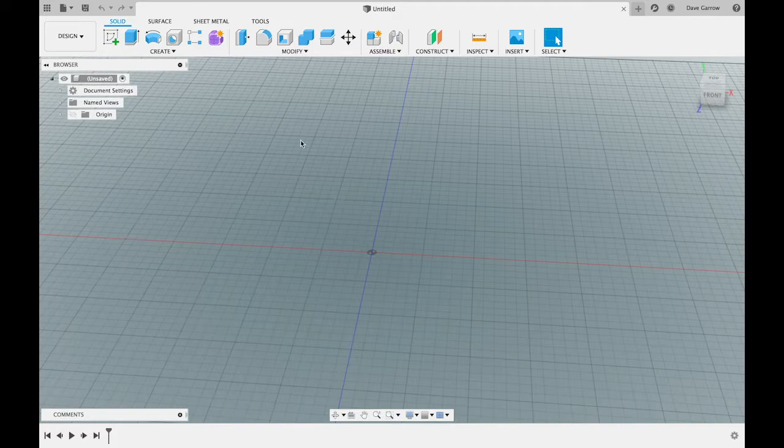Okay, so I'm just going to create a box with a lid and maybe a drawer or something, just so you can get an idea of the layout of the design section of Fusion, and the easiest way to do it, or the way that I do it anyway, is starting with a sketch on this plane, which will be the ground.

Create a 2-point rectangle up here, click finish the sketch, click extrude, and then you can pull it up or define the size. So I'll say 10 is fine, and then we want it to be a new body, so it's already there, that's fine.

And then if I want to change the dimensions of this, you just pull aside, extrude it, and let's say I want that to be another 50 that way. I want it to be 50. And then join, because it's going to be this part of this, like this. Extrude, another 50, join, okay.

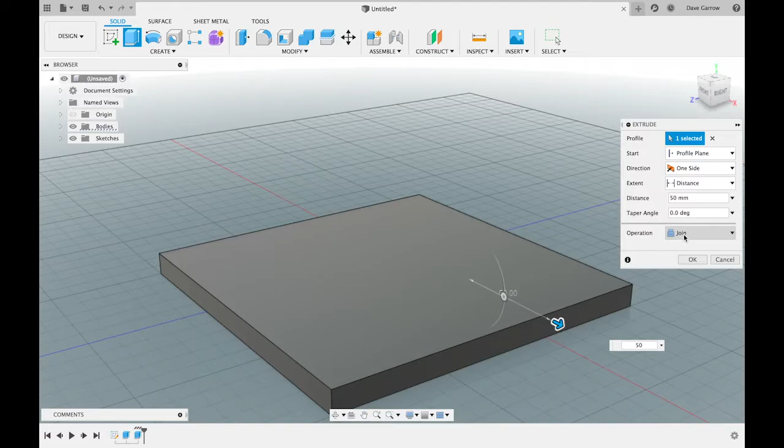So now it's a little bit bigger. When you create something like this, it all goes into bodies. It just creates this body folder for you, which is fine. You can leave it like that right now, and you can see it highlights body 1.

So then if I want to create a top or a side or something else like that, what I would normally do, if it's going to be a square or something, is go into bodies, click body 1, right click, then move or copy, or click M, and it'll allow you to move it, and you get this move tab up here. So I just want to move this up to create the top, but over here you can see create copy - click that, and when you drag this up it creates a second one.

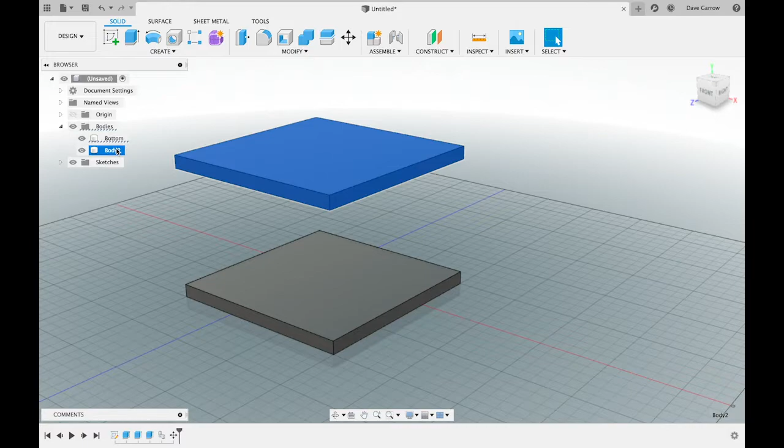Okay, so then I've got top and bottom, and you can see I've got 2 bodies in here. So you could rename them if you want, or just double click them. So body 1 is the bottom, and body 2 is the top.

So then I want to create sides, basically. What I'll do is take the top and click this eye, which makes it appear and disappear. Click top so that it gives me the top view. And I'm going to create a new sketch on this face, because that's where I want my sides to come up from.

So back to the top view, create a new sketch, and instead of clicking a plane, I'm just going to click on the actual face, which means I can draw on the actual face. 2-point rectangle, it'll snap to these points, which is fine. So in this sketch palette, what I want is snap to be turned on, so that it gives me this snap feature.

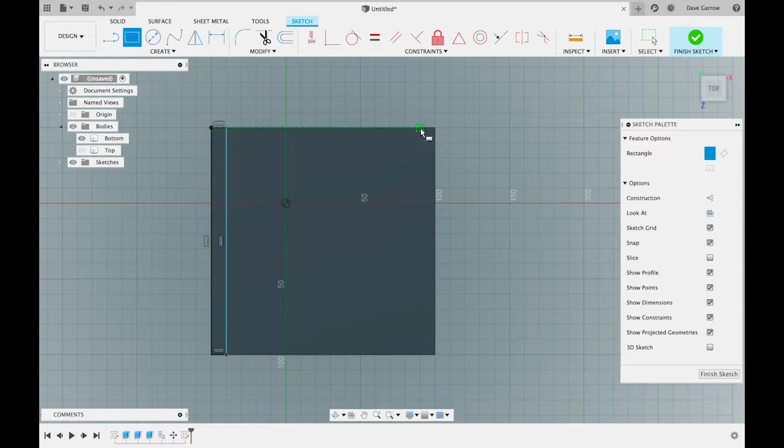So one click there, and then as I drag this it'll tell me it'll snap to round figures, so 10 mil all the way along, and then another one over here, 10 mil. And then if I wanted, I could just keep drawing these bits, 10 mil. And the front we'll leave for now. Finish the sketch. And then what I want is to extrude all of these up to the top.

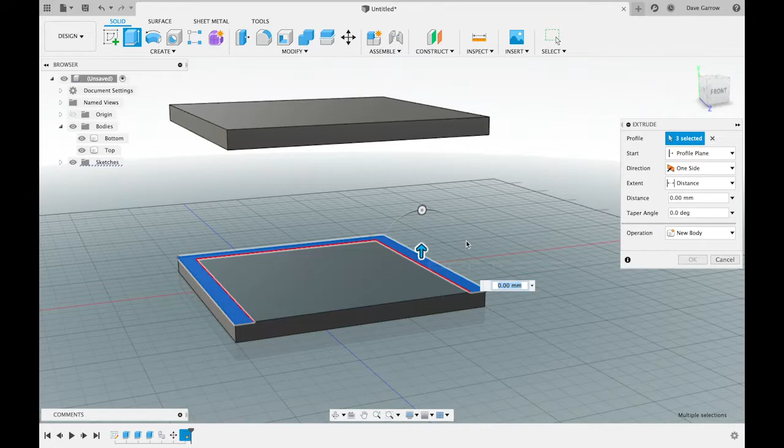So click one, and then hold down Shift. Click, holding down Shift. Extrude, and then I can just drag this up or type in whatever I want. I want these to be new bodies as well.

I don't really want to join these, because once I've joined them, they're part of everything that it touches. But I might need to have these disappear one by one. I might want to have them as moving parts later on. I don't know yet, so at the moment they're all new bodies. Best to create everything as a new body, in my opinion, just because I found it's easier for me.

So there we have a box. And what I ideally want is for this to be a lid that can flip open, and a drawer to come out of here.

So if I want a drawer to come out of here, I'm going to take the top section and turn it off. I'm going to go back to top view, and then I'm going to draw a sketch. I'm going to click the bottom face again, and I'm going to draw the dimensions of the drawer that are going to go in here.

So to start with, click rectangle, it would help. Click the dimensions of the drawer, which is going to be the inside dimensions of this. Ideally there'd be some clearance here so it could move in and out, but for the purpose of this it doesn't make a difference. Finish that sketch.

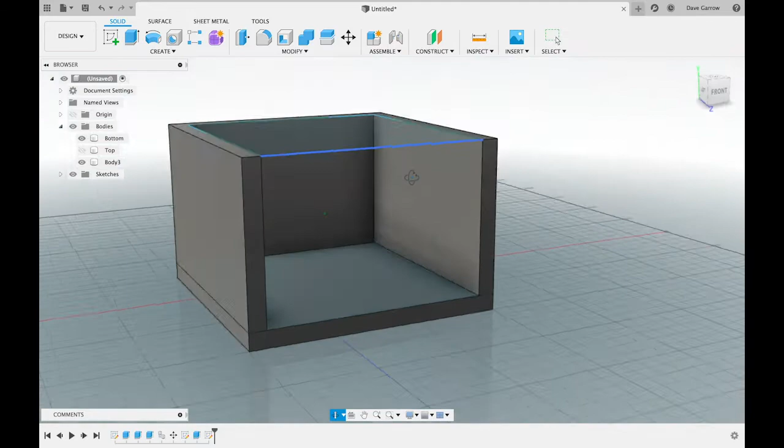That's a pain in the backside because it's snapped basically to this top face instead of this bottom face, so get rid of that. To get rid of it quickly, you can click Command Z on a Mac and it'll just go back a step, or you've got this timeline, you can go back a step or delete stuff, whatever you want.

So sketch again on this bottom face, just using a slightly different view to click the face I want, basically. Finish the sketch, click the face, extrude, and I'm just going to type in 5mm, in fact 2.5mm.

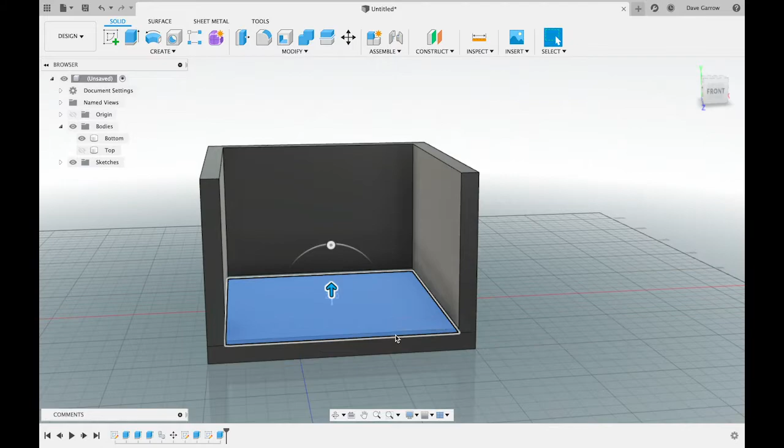The mistake I made there is I clicked join instead of new body. So back again, click extrude 2.5, and then over to here, new body. Okay, and then you can see it's a separate piece, which is what I want.

And create a new sketch on that face, and I want to click here. So I want this to be 0.5 in width, and over to the edge.

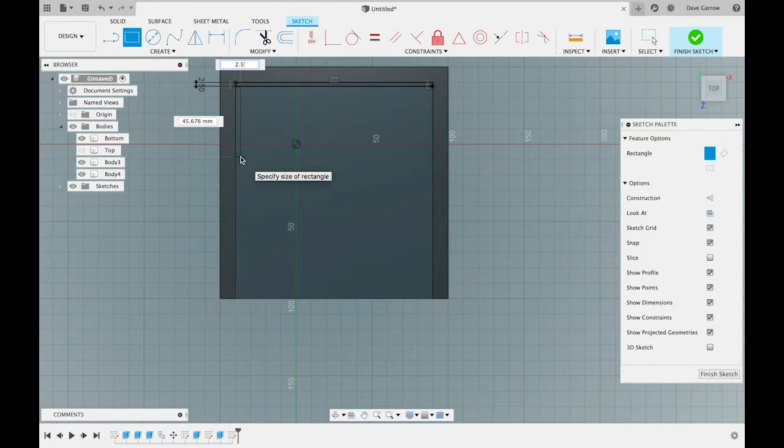So to jump between these two measurements, you just hit tab. So this is the one I want to be 2.5, and then it locks it, and I can drag these down. So then here, click the corner, and the wrong measurement there, so tab 2.5, locks that one, and I can pull this down to my click point, finish that sketch.

And then all I need to do is zoom in, click. You might have to zoom into some of these faces just to be able to click them. Make sure that you hit shift whilst you're clicking them, otherwise they won't all select.

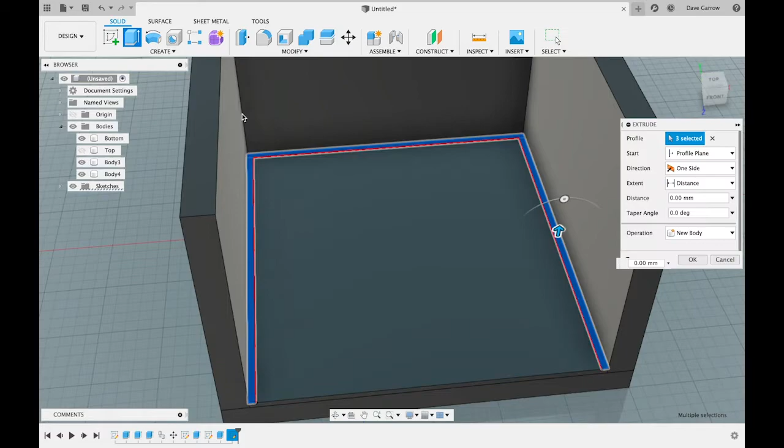And then extrude and pull it up. I want this to come up by, let's say 30mm, and then new body. Okay, so then we have the makings of the shelf thing.

And what I'm going to do now is just create the front. So create a sketch, and I'm going to draw on that face again. 2-point rectangle, pick a fixed point like here, drag it out, 2.5mm, locks it, pull it over, finish the sketch, zoom in, click the face.

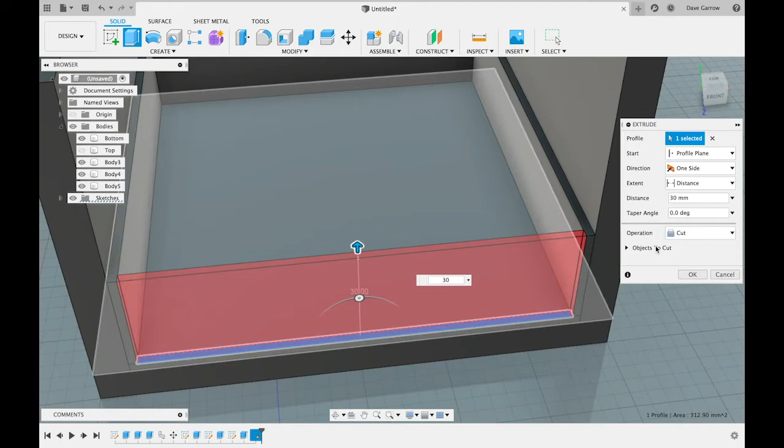Extrude 30mm, and then because it's coming through a face, it's trying to cut it, so I want new body. Okay, and there's the shelf, drawer, sorry.

Lovely. Okay, so now what I want to do is create the rest of the box, basically the front of the box section that would go up here. And we've still got a lid somewhere. Yeah, so I'm going to try and create a front face.

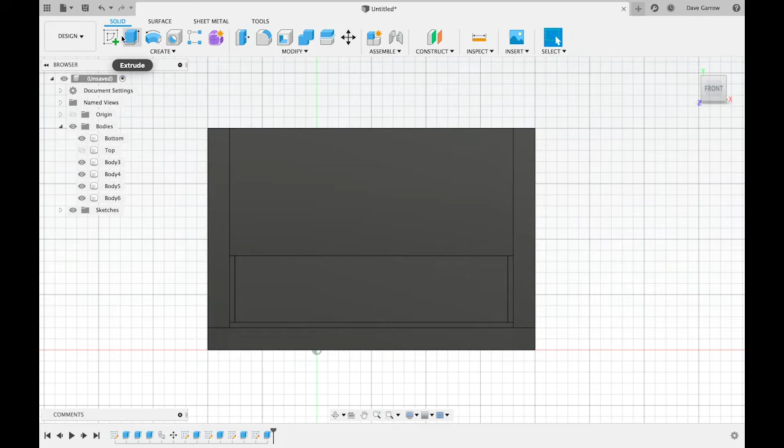So I'm going to click front. This is the front face. These are the dimensions here. I'm just going to click sketch. Now click it on this face because that's aligned with the front face I want to use.

Rectangle, click. You'll leave a small gap here. Click. Finish the sketch, and then you can see that's in the position we want. And then click the face, extrude, and pull it back. You pull it back by 10mm, which is the same width as the rest.

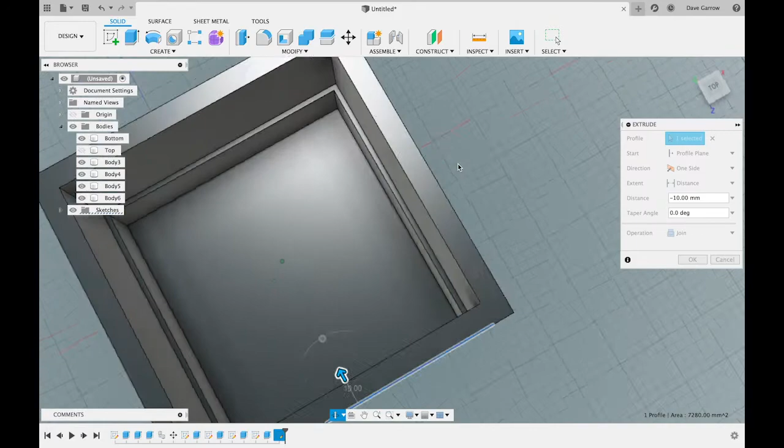And you can join this if you want. I'm just going to go new body.

Alright, so what I want to do is create another bed inside here, which would be where something would sit inside the top of this box, but not inside the drawer.

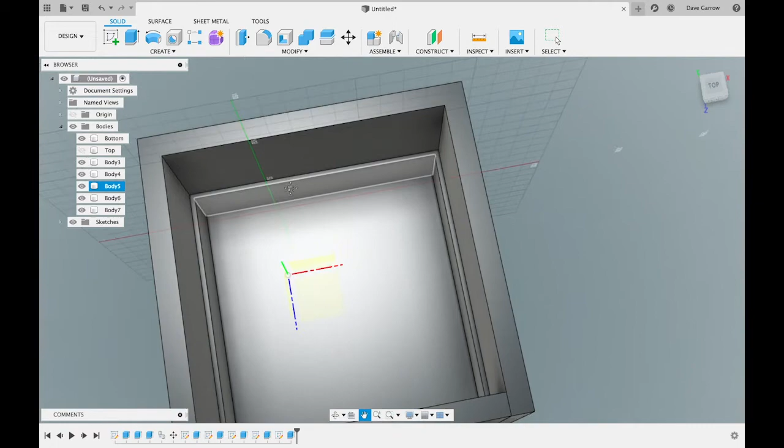So to do that, what I want to do is create a new sketch, and then the face I want to draw on is, I'm going to draw on this bottom face. And then I'm going to move the section upwards afterwards. No, I'm not actually. I'm going to create it on the top and then drop it down.

So this face should be on the top, which it is. Click it. I'm going to extrude it up. I'm not going to do 10mm, I'm going to do 5mm.

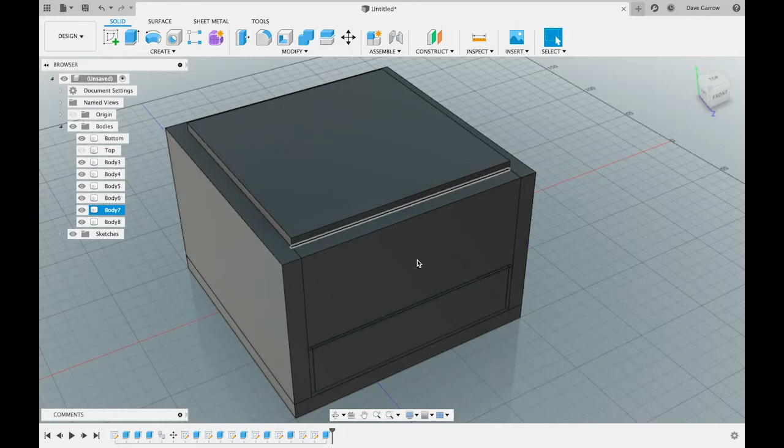New body. Okay, with this body, when you highlight over this, it tells you at the left here which body it is you're touching. So body 7 I want rid of so that I can see, and this will be the last body, which is body 8. Hit M.

And then I'm going to drag this down until it sits pretty much where I want it to sit, which is going to be about there. Okay, so there's the bed. We bring back body 7 and you can see we have that there. And I'll bring back the lid, and that's our lid. Okay, so now we've got a box with a drawer and a lid.

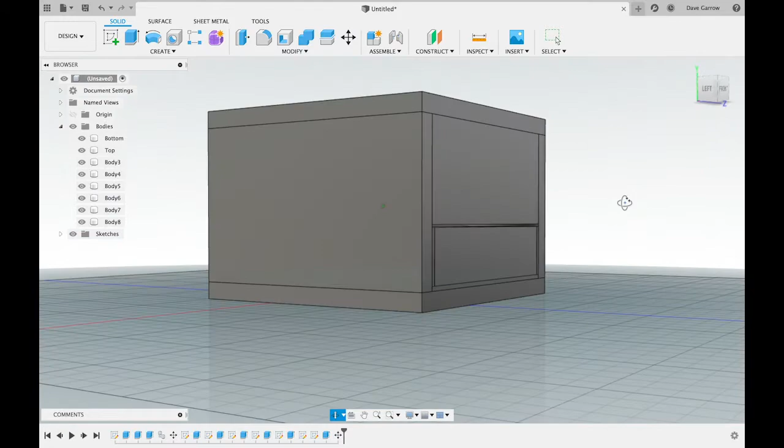So now I want to separate these items into components so that later on I can move them independently. Top, I'm just going to rename that the lid. Bottom is fine. Now the sections for the shelf are this, this, and this, so the rest of it is fine. These three I'm going to name drawer, and then they're all named drawer, drawer 1 and 2.

So now I know if I'm creating a folder or a component, I can stick these three in. If I was to create components now, I just right click on the folder that says bodies, create new components from bodies - and that's not what I wanted. Go back.

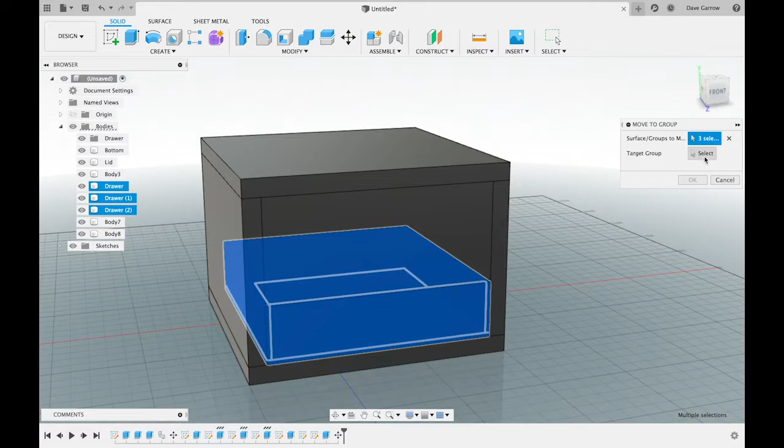So what I'm going to do is a new group first. This is going to be the drawer group. I'm going to highlight the drawer sections with shift, right click, move to group. Over here you get target group, click that, select drawer and OK, and then you can see everything is in the drawer folder. So if I hide the drawer, the entire amount of everything in that disappears and comes back - that's fine.

So now the lid, I want it in its own one. On the bodies folder, right click, new group, double click, lid. Right click the lid, move to group - we've already selected the item - target the lid folder and OK. And now that's in the lid folder.

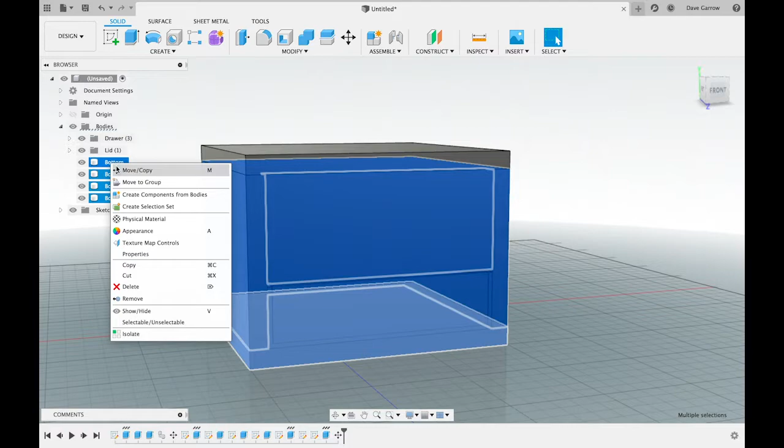And then all this stuff is for the box itself. So if I was to highlight these, right click, double click, rename box - that's all box features. Bodies, right click, new group, name that group box, move to group, target group the box group, OK, and then they're all in nice folders.

So what you do is you right click on the very top here, new component - that creates another component folder - and then you drag in the body into the component folder and it copies it.

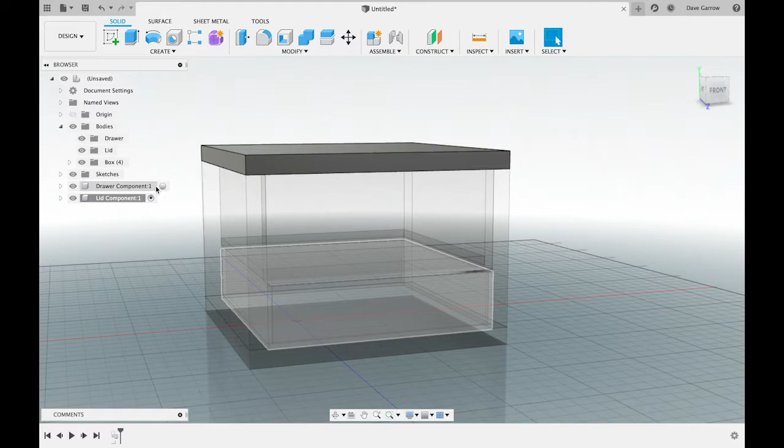And then the box I don't need to move, so these are the only moving parts, which are going to be the drawer and the lid. So this is the drawer - just rename that drawer component. And then rename this lid component. Basically when you click or unclick them, it makes them active components within the file. So at the moment, everything is activated.

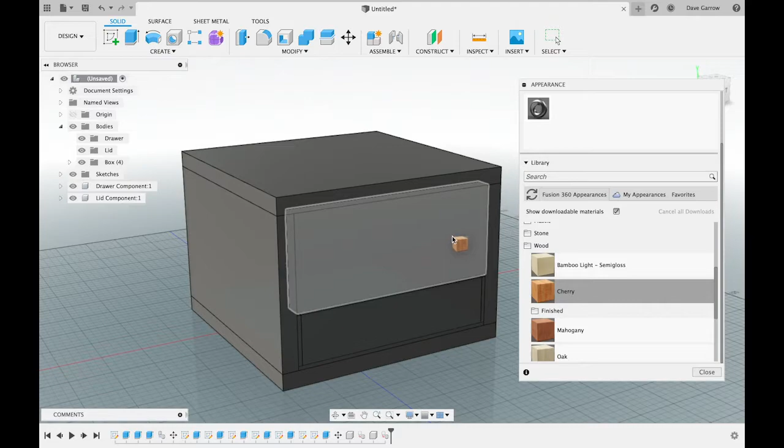Now if I wanted to add something like appearances to this, then whilst you're in this design mode, just click A and the appearance file comes up. So I want this to be a wooden box, so I'm going to click the wood, find some nice wood like cherry, and you just drag it onto the relevant bodies. So for example, I want all of this to be cherry at the moment.

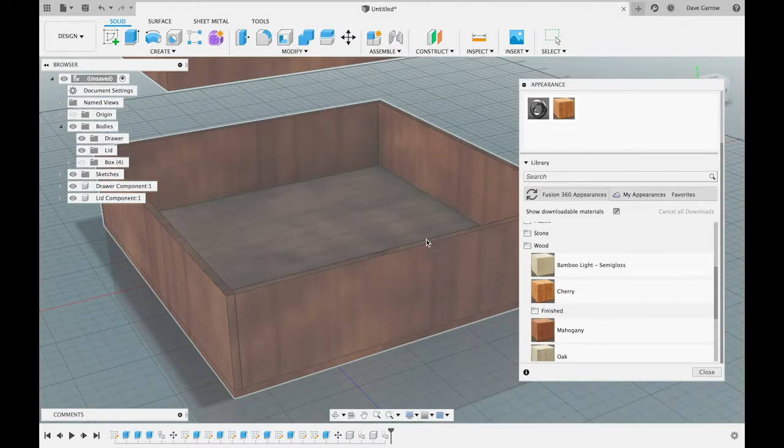It's all looking very box-like now. Okay, so...

Let's say you wanted to apply fillets of some sort - you wanted to round some of these edges, which is fine. You would take the fillet tool and then you would click an edge, and then you can either drag it in and out like this, or you can type in an amount. So if I was to type in a 5mm radius, that gives me a 5mm radius on that side. Now I don't want that.

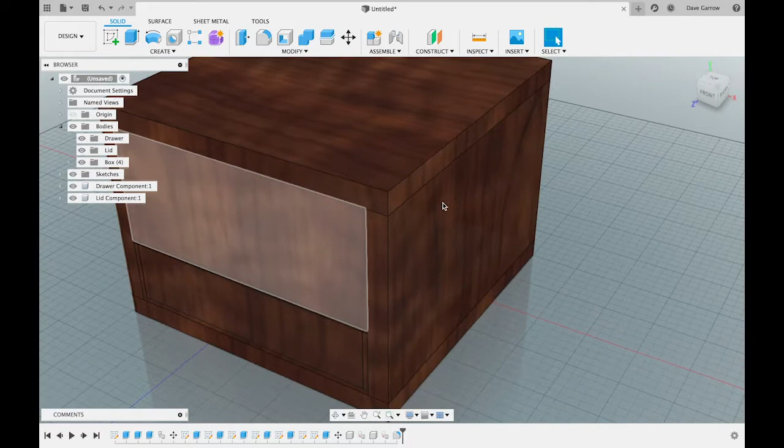Now obviously when you click this and apply radius, you should click some of the adjoining lines here, and you just hold shift to find those. If I click 3mm now, then it rounds the entire section off, which is fine. So we'll say 3mm there, come over here, click, hold shift and click all the way down, fillet, type 3mm, enter, and then go all the way around and click these lines with shift, fillet - and it's the same with chamfer.

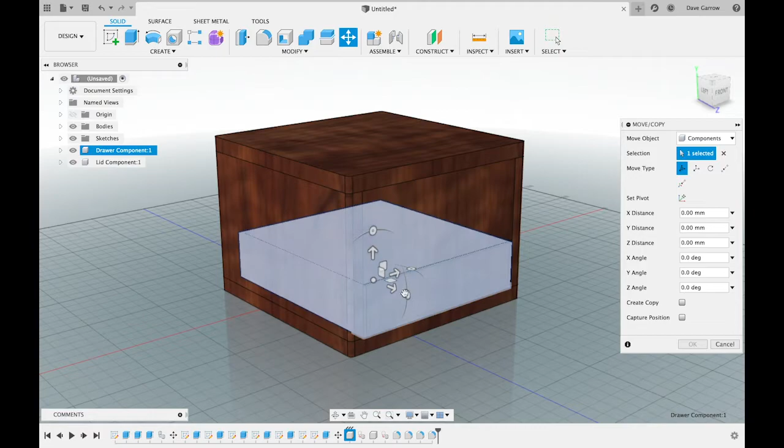Now, just so what I'll do is, just so you can see the parts move independently from each other, if I click the drawer component and then click M, I can then move this in and out. So say I wanted to keep it there, I just say OK.

I think that's reflecting off of something else in there. It's this grey bit here. If I get rid of the drawer, that's a sketch file. So the sketch, that's a sketch layer that's making that look weird. So if you go to sketches and click the eye, that'll disappear. And then I can bring back these and it looks better now.

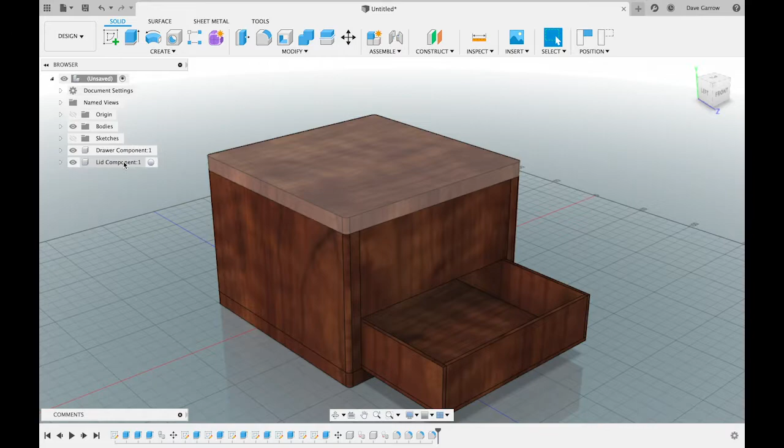And then let's say I want to open this lid. What I would do is click the lid, click M, and then over here I've got a rotate tool. Now I could use this rotate tool, but if I do that it's going to rotate it around the wrong axis, which is no use. So click the rotate tool, and then in here it's giving me a selection here, pick the axis. So if I go around here and I zoom in and I click this axis, because this is the point where a hinge would be, click that, and then zoom back out, and it's going to let me rotate that now around that axis. Click OK, and now it looks like it's nice and open.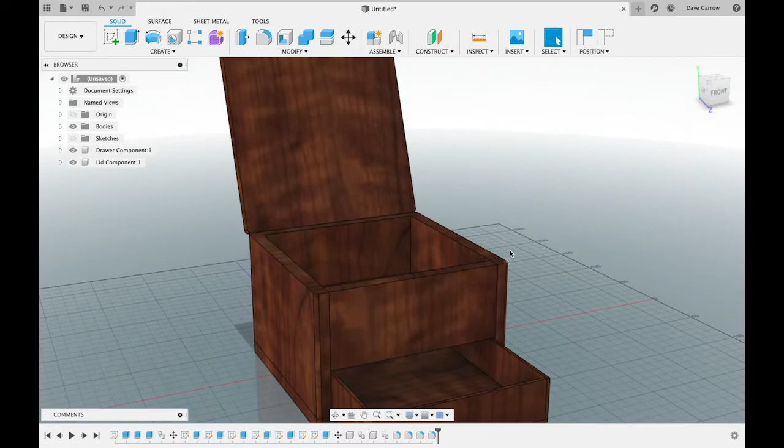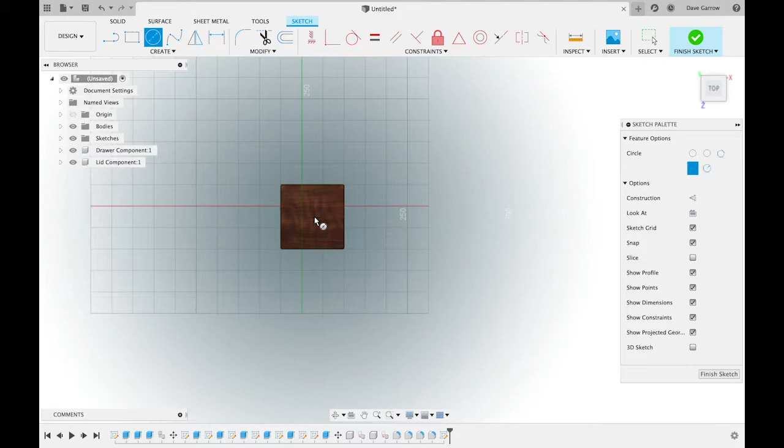Very nice. So I'll leave it like that just now, and what I'm going to do is, to render it, I'm going to put it on top of like a podium. So if I want to render this on something, just click the top, pull out a bit, create a nice sketch on there. And I'm going to make a circle podium. Finish the sketch.

My sketches have been turned off here, so turn them back on. Extrude. Take it down. Right there. Not join. New body. Now it's sitting on a little podium.

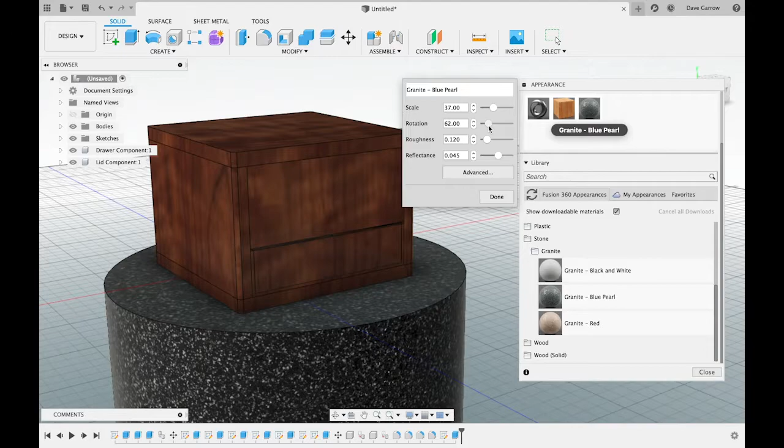I'm just going to change the appearance of that podium to a stone. I find this blue pearl is quite nice. Now the issue here is that it looks really, really pixelated and grainy and rubbish. So if you go up here where your appearance selections are from the past, you right click, edit, and then I can change the scale of this to look more like a real marble. And you can change the rotation and loads of other things. Right now we'll leave it like that.

And then I'm going to click the fillet, click that edge, and I'll give that a 5mm radius. And then it looks a little bit nicer.

Okay, so what I'm going to do now is get something from GrabCAD, fire it into this model, and just show you how you can do that. So this is GrabCAD, I'm in the library. I'll probably have to sign up to get any of this stuff. I'm just going to find a pencil.

There's a step file. Download. Unzip that. IGS, okay.

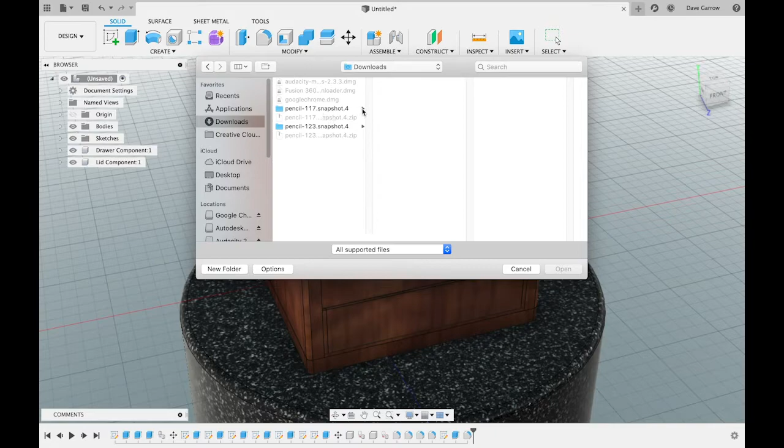Go into Fusion and then go to Open, from my computer, into Downloads, find the pencil, click the file that's highlighted, open. There you go, so that's it in Fusion.

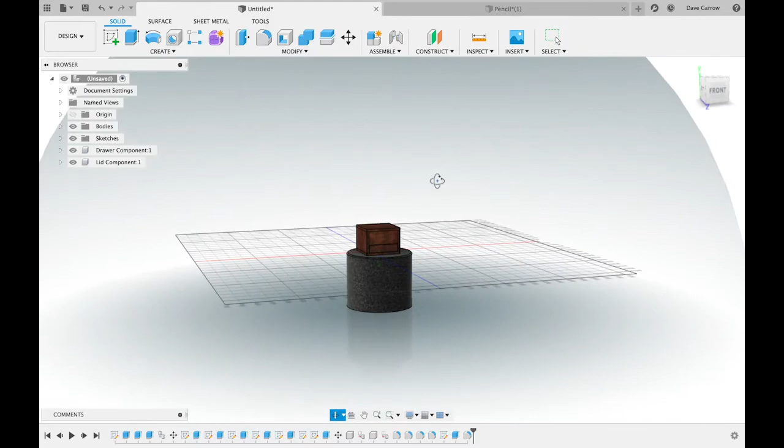It's in a brand new file, which is not much use. So what you want to do is click this section here, Command C for copy, go back into your original file, zoom out a wee bit, Command V, there you go. Command V might not work, so right click and paste new comes in, and then it pops it in as a new component, which is nice and handy.

Now it's awfully big, so I'm just going to move it, rotate it 98 degrees, take it down. I'm just going to stick it onto here. Now I'm just going to say OK, click the pencil again, go to Modify, Scale.

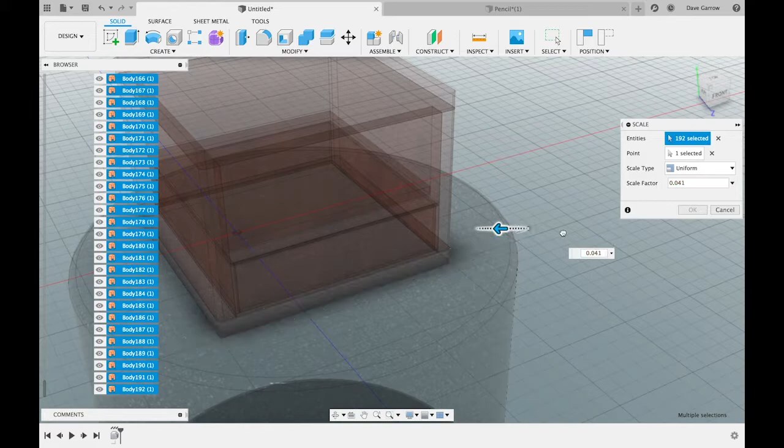So there are a lot of bodies in this file. Usually it's not as complicated as that. So you just click, hold shift, and click the last body, and then pull this down to a more appropriate size. My computer's really slow, so it's going bananas at the minute. That looks okay, just click OK.

Okay, so that's a better size. Come all the way back up. Get rid of all that, don't want to see that. There we go. Click the component, hit M to move. Now I want to free move this, which is the normal type of moving things around.

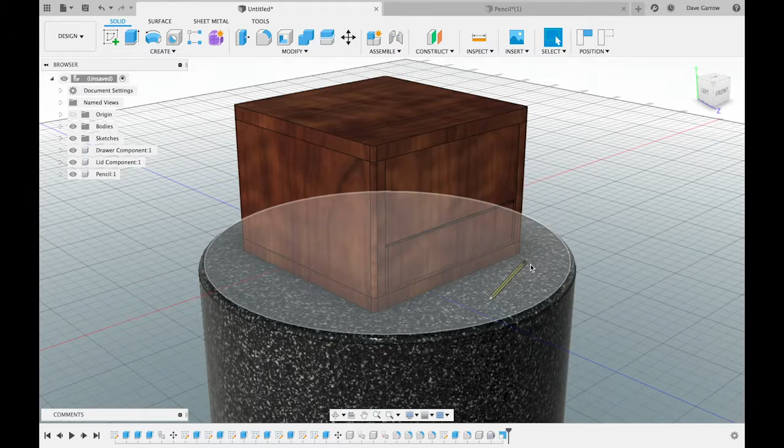What I want is for this to look like it's naturally sitting here and not placed here by me. It's a little bit diagonal, that's okay. Go back here, activate those components just so you can see them again, and then you have a pencil sat on here. Okay, so now we've got the podium, we've got the pencil, we've got the box.

What we're going to do is go into this section here, design, go to render. This takes you into the render workspace. Now we're in the render workspace, but it's all black. I'm assuming because we haven't set up any light sources or anything like that.

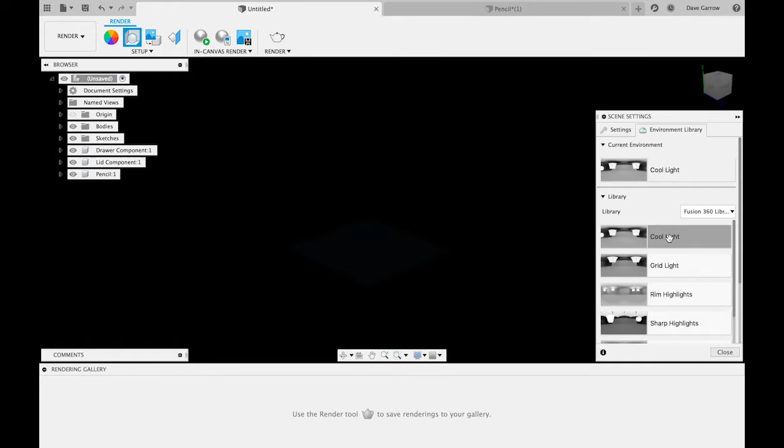So here where it says setup, click that and you get this library. There's a custom environment setup, which is no good. So if you just double click one of these other environments, here you can see what we've made. Cool light looks the most natural out of these artificial light sources. You can see this looks a little bit better than it did, but still not great.

So when I'm doing a render of any kind, what I do is I try and get a custom environment attached in. To do that, you go back to Chrome, and this is the website I go to, which is HDRI Haven, and you can just download for free a bunch of these environments. I don't necessarily want the background that's in it, I just want the light source, but I will show you what it looks like.

So this is the one I want. Scroll down to download. I'm going to take the 4K version, it doesn't make a difference really. And that's that one downloaded.

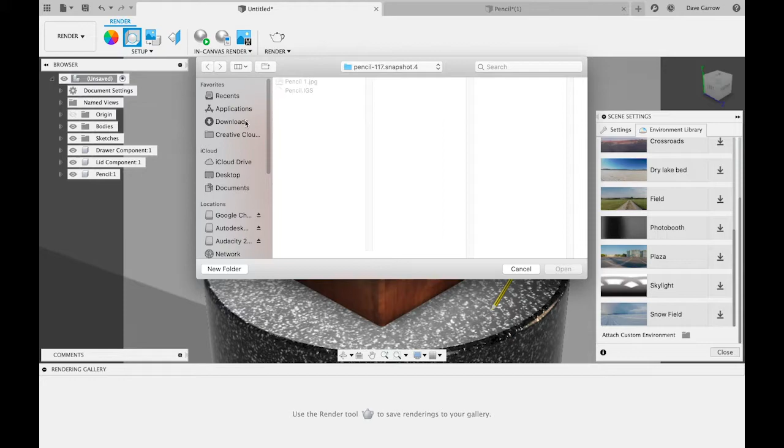Go back into Fusion, attach a custom environment with downloads, this one here, double click it, and it should load as a HDR environment. There we go. So if I pull that back there, here you can see we have a fairly realistic looking environment.

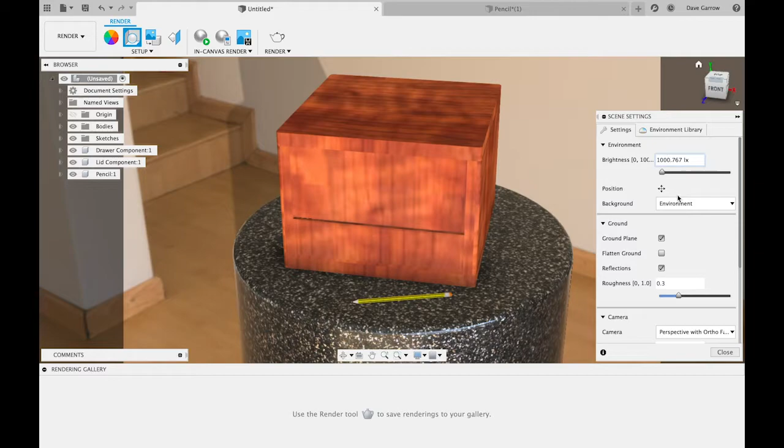Now, if I come back into my scene settings, now that that's selected, that's fine. Here we can control the brightness, usually it's okay around 1000. Position, we can move everything but the box. It just saves you moving the box around maybe 2 minutes.

So let's just say like that for now. Background you can either set as a solid colour and utilise the light against a dull background, or you can just use the environment. We'll use the environment just now.

In the ground here, you've got ground plane, flattened ground and reflections. I just leave this as it is. Flattened ground means place the item on the ground, which I just leave the way it is, unless I'm putting a bottle on the ground and not on a podium. That's what I'll use. Roughness I'll just leave the same.

Camera I use perspective with ortho faces. Focal length you can change as if you're using different lenses on a camera. I'll leave it at 89-ish, which is fine. Exposure, if it's blowing out the environment, you can move the exposure up and down. I'll just leave it roughly the way it was.

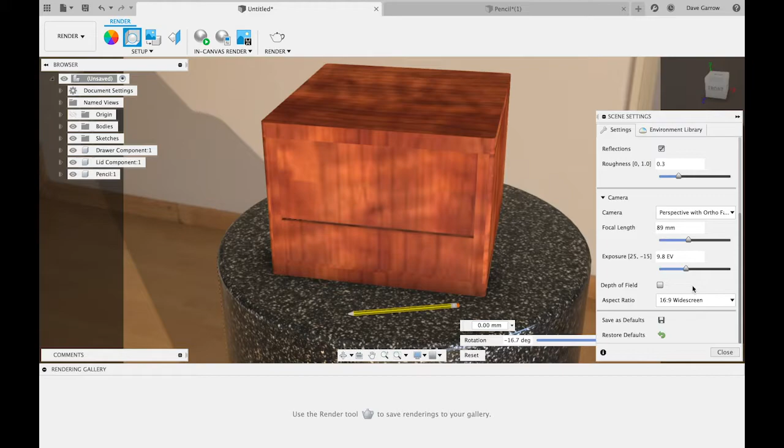Depth of field, click that, then you can have a focal point to focus on. So let's say I want to blur everything but the tip of this pencil, and the center of focus will be here.

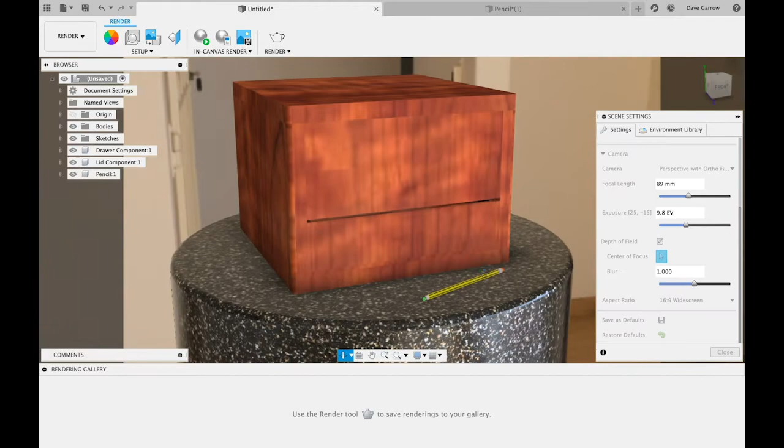We had an issue there with the ground plane, so just click the ground plane off and it came back. And then the blur, the only way to get a look at it is to go into in-canvas render, and that will try to pre-render it and give you an idea of what it's going to look like with the blur. It's difficult because it doesn't render that quickly and doesn't give you a really good idea, but you can see these sections are all quite blurry and horrible, and the focal point is here.

So this type of blur is quite a lot. I usually put it at about 0.200, and then some of this will be blurred, but this will be fairly nice.

Aspect ratio 16:9, that's what I leave mine at, and you can change it if you want, but it doesn't make a difference. It's just what's grayed out on this section here. This is the points that will be rendered, so 16:9 is fine with me.

Stop the in-canvas render, and we could fiddle with some more appearance stuff. So say I don't like this type of wood, let's go to wood again. Say I want the drawer to be mahogany or oak.

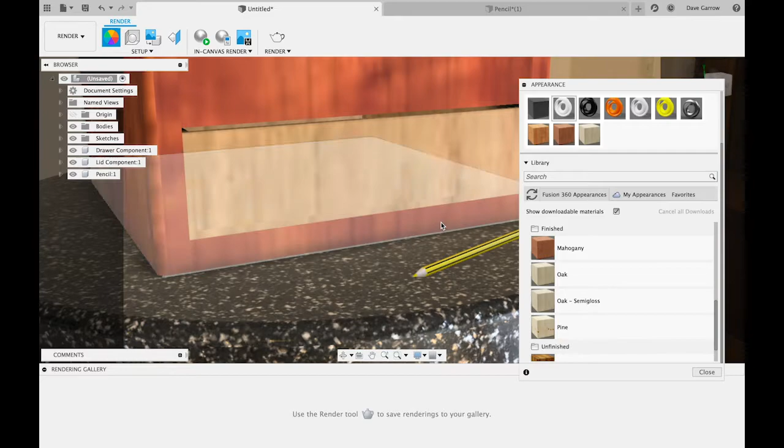That's the whole drawer basically in oak, and let's say I want the rest of the box, or the lid, to be walnut. That looks rubbish.

If you have some of these materials and you don't have them downloaded, just click there and it'll download quickly, and you can drag it and drop it onto any of these faces or bodies. When I drag them onto here, it's actually attaching them to the body, but you can attach just to a face.

So if I want the very top of this to be a different colour, I'll go up here and go to faces instead of bodies, and then I'll drag one of these things. So I'll drag mahogany just onto the face, and you can see it changes just that bit.

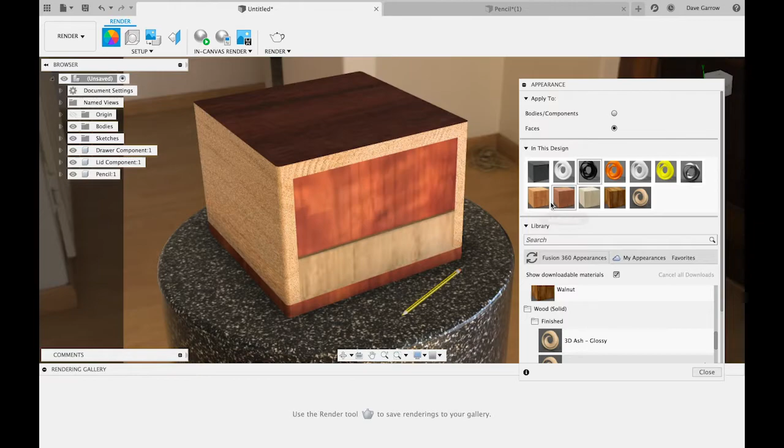In this case, just find some fancy wood. This looks really strange. Go back up to bodies, back down to the wood. That's really mental, I don't really like that. Try this. That was better, so I'll throw this on.

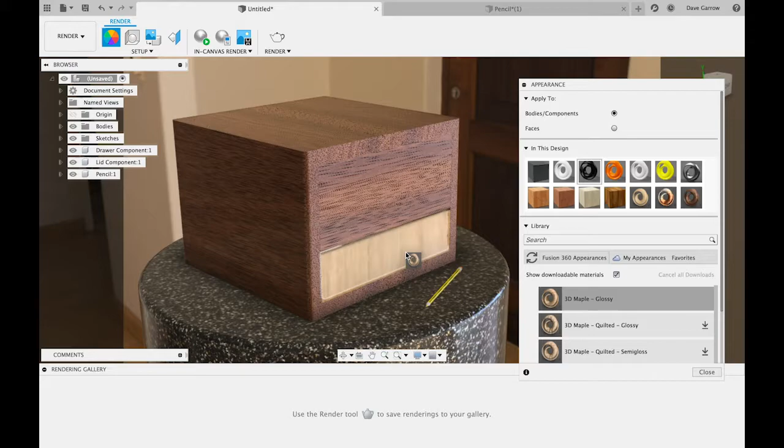That's not as horrible. Some of these 3D ones are a lot better looking than these flat ones. These flat ones can be not great, you can see how it doesn't look great, but these look a little bit better even before we've rendered anything.

So if I download this 3D Maple and throw that one into the drawer component, that looks a little bit better. Right, so if I was going to render this out, I'll go back into setup.

Center that, and I'm going to go down to center focus. I'll click it off, which takes away this previous one, click it back on again, and click just this center point here, and I want 0.100. Now 0.100 will give me like this outside section blurred, but this should be within focus.

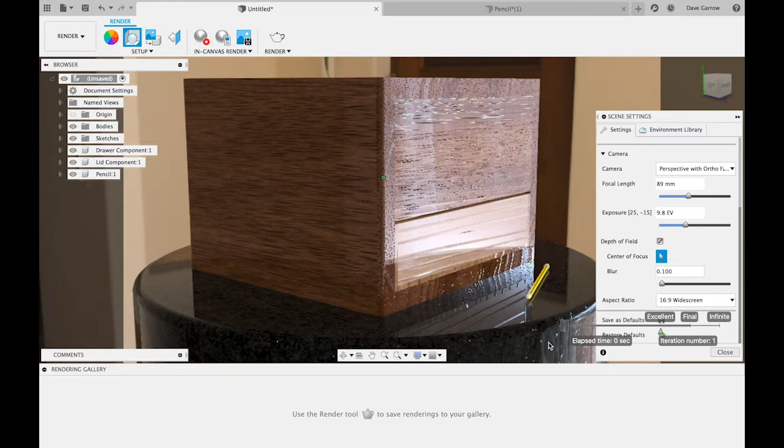So if I go to in-canvas render and just get a sneak peek at how it's going to look, just zoom in a little bit. Whilst it's rendering, you can still move it around. So you can see there, that's not awful, doesn't look that bad.

So what I'll do is go into the render button and save it first. So, save this box. That's fine. Back into render, being saved. There we go. Okay, so to get a nice quick render, you can use custom.

To get my final renders, I click print, and then one of these options, it doesn't really matter, but 300 points per inch, pixels per inch, I have no idea. Local render means to render on your machine and use your machine's power to produce it, which might take longer depending on how strong your machine is.

Cloud renderer sends it to servers owned by Autodesk, and they render it for you. That's why it uses some credits. I can't remember how many credits you get in total, but I've used this hundreds of times and still have some credits left somehow.

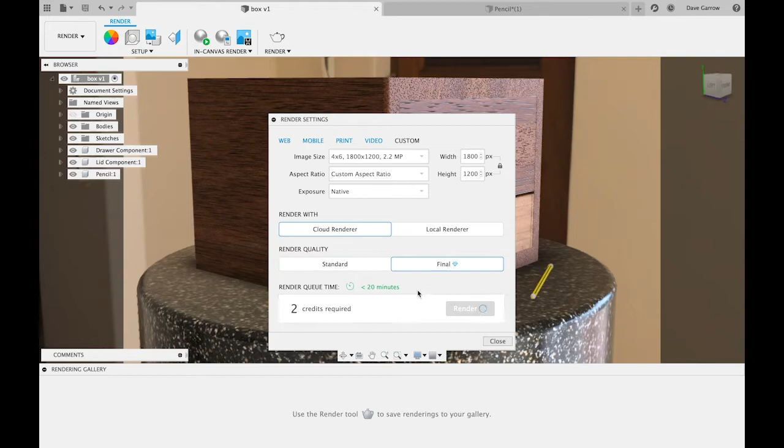I'm going to go custom, cloud render, final. I always do final, you can go standard and it uses one less credit, but we'll use final just now. Native exposure, I'd never touch any of these, and the image size I don't really touch either. Click render, and then that comes down here into the render tab and it will render in the background.

So whilst we're doing that, I'm just going to organize one more render, which is going to be a close up here. So if I want a close up of this pencil, I go into the setup tab again.

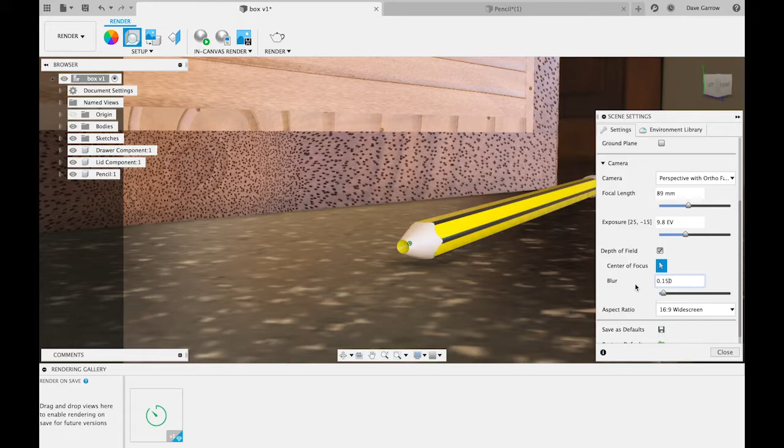I'm going to change the center focus off, turn it back on, and click at the end of the pencil, and I want to click these to 150, then in-canvas render to get a peek. I can see that's going to be blurring a little bit too much, so I should have left that maybe at 100.

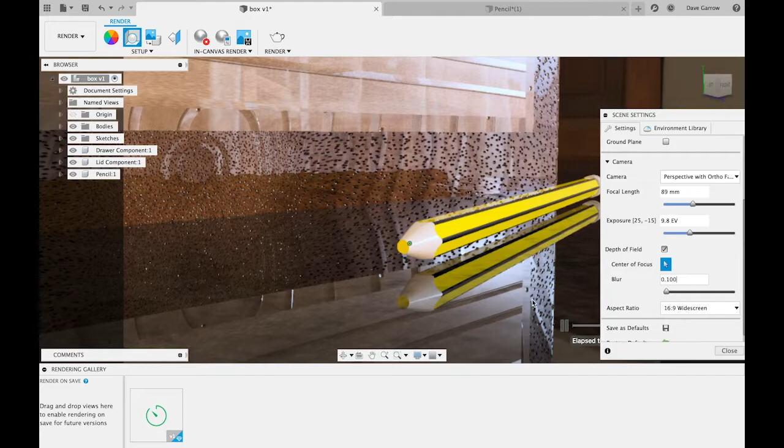I'm thinking even further down than that now, that's still a little bit blurry, so we'll go to 80. Maybe back to 100. Stop the canvas render.

That'll be fine. So render, back to custom. I was going to make a really high quality render, which I will do this time in fact - 4K, cloud, final. You can use a local renderer if you've got a really good computer, but I don't. Render.

And then we'll just wait for these to render out. Whilst that's doing its thing, I'm going to show you how you can imprint something onto here. So if I go back to design...

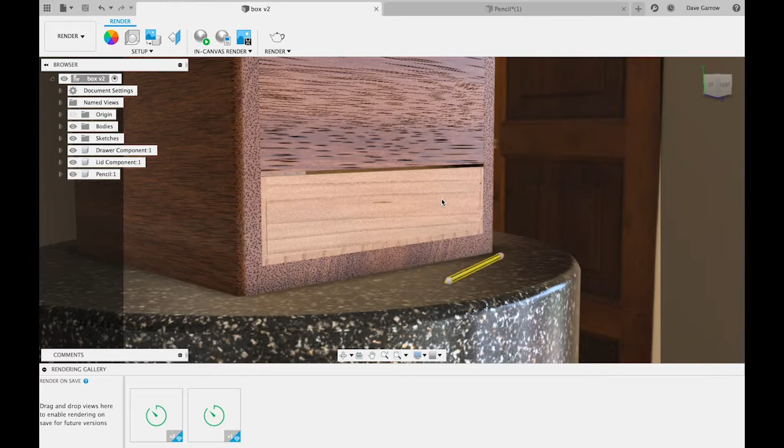I'm going to go into Illustrator, and what you want to do is create something in Illustrator. The reason is because it's going to be a vector and can be scaled up and down without losing any quality. It doesn't get pixelated. We're going to create an SVG file. Fusion needs it to be an SVG file for some reason to accept it, but once it is, it's totally fine.

And what we're going to do is use that to either emboss or deboss some words onto the wood. So hopefully that will open up soon. There we go.

Okay, so we'll create a new file. The size of the file is irrelevant because we can scale all this up and down. So I'm just going to go to print, A4, and landscape. There we go.

So create new text. And I'm going to say... Fusion 360. Scale that up a bit.

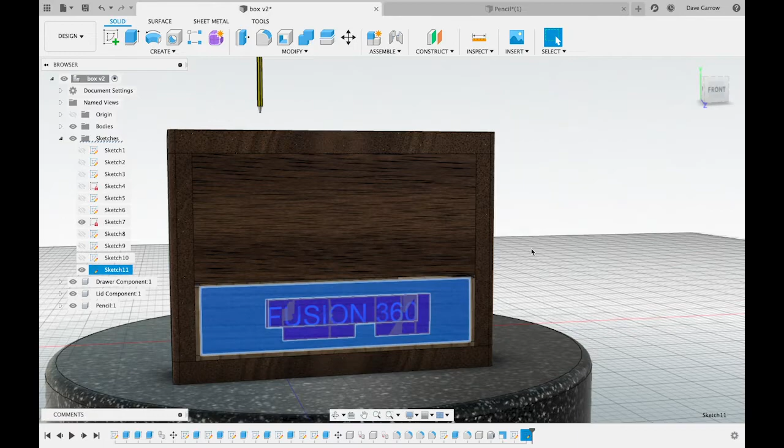Alright, finish the sketch. So then all you do is click the sketch, click extrude, and then pull it back. Okay, so there you see, as I'm pulling it back, it's cutting into the wood.

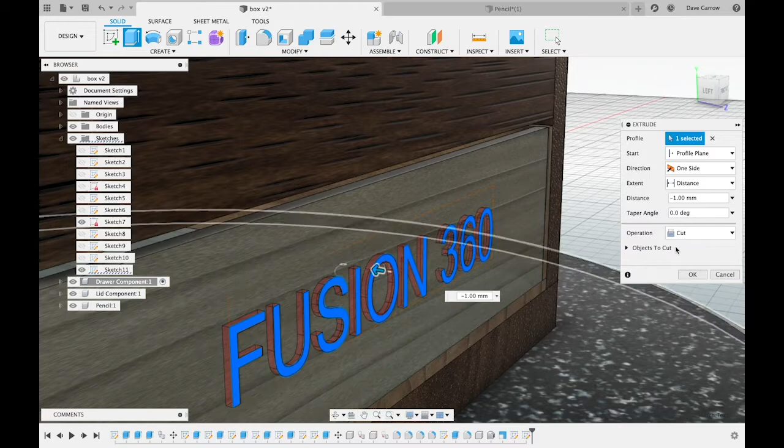I don't want to go that deep, so we're going to go -1. Wait for it to load. There you go, -1 cut over here. Okay, and that's it, cut into the wood.

So then go back into render, and you can see it's cut in. So now if I was to set up for another render...

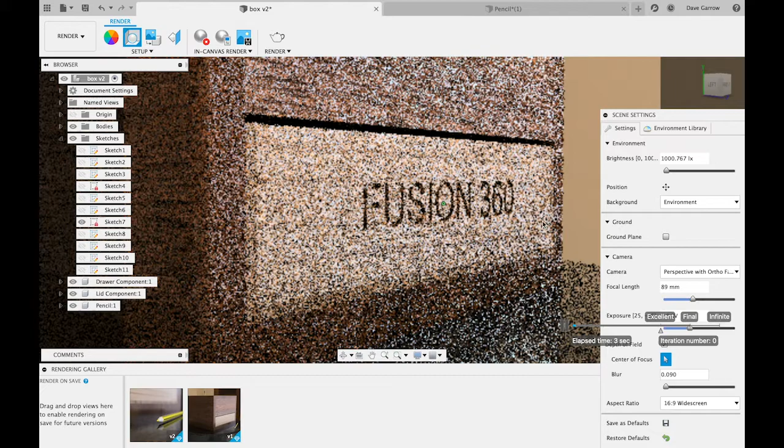Go to the scene settings, then to center of focus, click again, click there, take this down to 90, in canvas render, and then I'll blur out this little background section here. Hopefully this should be in focus.

What we'll do is stop the canvas render, we'll change the position to try and make the light a bit more dramatic. See there, we're getting a reflection on here. Check the render.

I'll just change the angle a little bit to get some light onto the wood. Keep turning, so you're just happy with it. So that looks a bit naughty, so we'll render that.

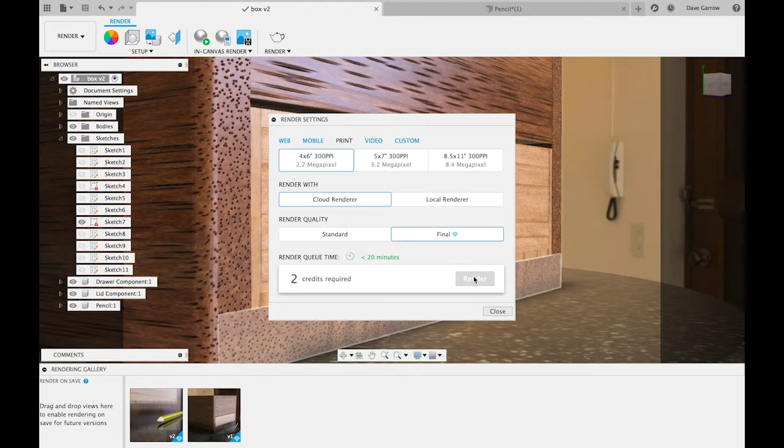Go final quality again, see what that one fires out. We'll have a look at these ones. You just click it and it'll pop up with the image, and then you can see that's not bad quality, looks okay. If I want to download that, I just click there and then download it as a JPEG or a PNG, whatever you want. Close that one, we'll look at this one.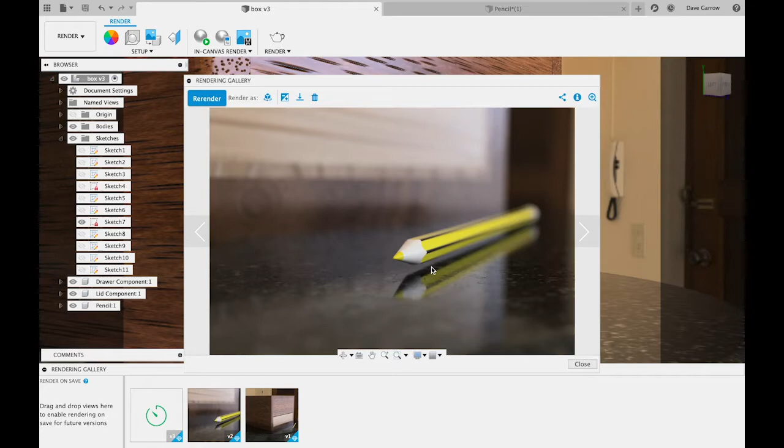That one looks okay. You can see it's a nice crisp image on the tip here, and then we've got a little bit too much of the bokeh effect, so maybe 0.060 or 70 would have been okay. It would have given us a little bit more of this, but still it looks okay. Nice reflections. It's not actually sitting on the surface, we're getting a gap here, but not a big deal. We'll wait for this other one to come through.

What we'll do is we'll go into the animation. So this is where you can begin to move things in and out and create a video. And in here I've got a list of the components that can move, so I don't really want the pencil just now. I want this drawer to come out, and I want this lid to open. Now you can see here it's recording everything that I'm doing, as in moving in and out like this, it's recording it.

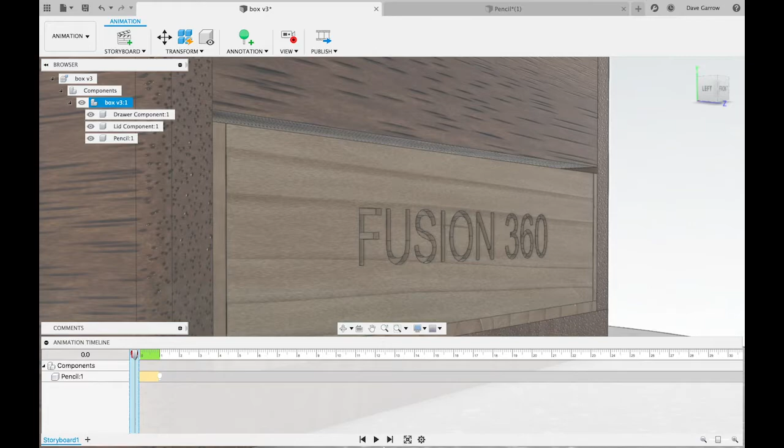So if I go back, and what I want to do is delete these other things that have happened. So what you do to start is click in this red section, and that means that nothing's been recorded as I'm moving around, because it will record every movement. So set it up the way you want it to sit. I want rid of the pencil.

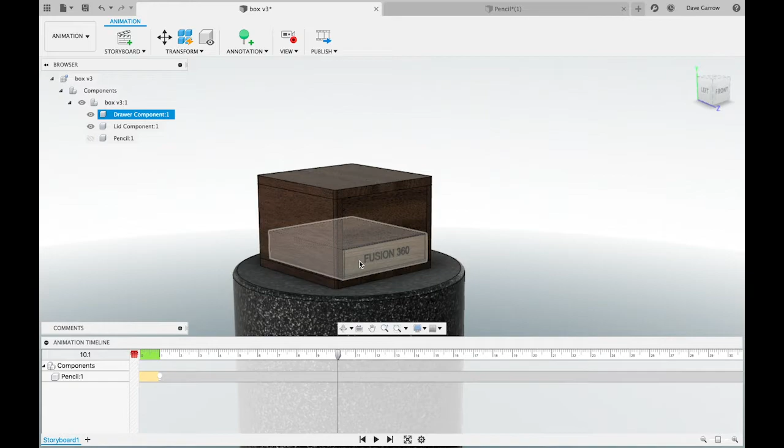And what I want is to set the time you want the video to be. So say I want 10 seconds. What I want to happen in that 10 seconds is the next thing that I do. So if I click the drawer component, click M to move, and then pull the drawer out to here, and then click OK. On here, I can click back. That goes back to the start of the video, a 10-second video, click play, and then you can see it moves the drawer out in 10 seconds.

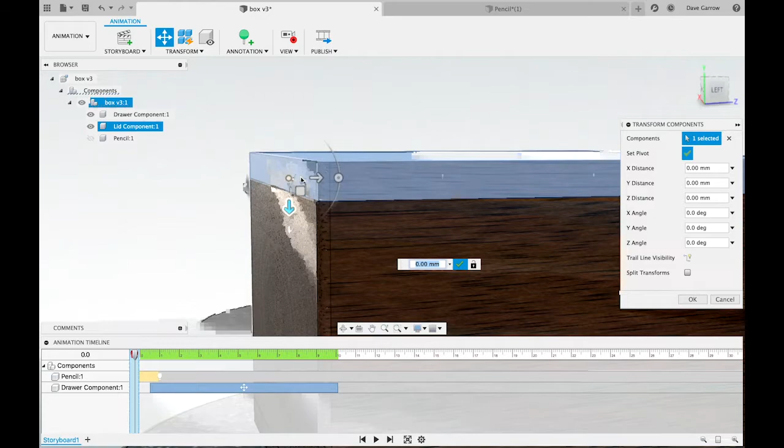Back to the start, click into this red section because I'm going to be moving around. I'll click the lid, click M for move, and I want this to open, but I need the pivot point to be right. Click here to set the pivot point, make sure I'm in the red here so it doesn't record any of this moving. Scroll into the pivot point, select that back corner, and then this is important - you need to click back off that pivot point and come all the way back out.

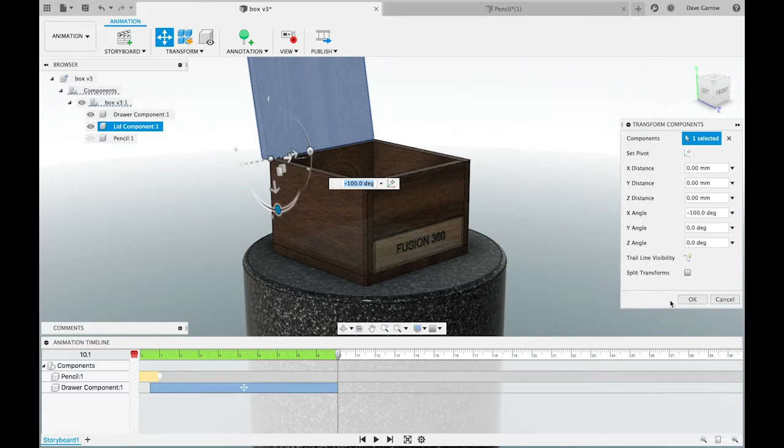Into the view that you want - that's the view I want. Drag this over to 10 seconds if I want this to happen at the same time as the drawer opening, then open the lid however far you want to go, let's say 100 degrees, click OK, and you can see it's added the rotate to this. Click back, play the video, and now it's opening both sections in 10 seconds.

So let's say I want the camera to move around whilst it's doing this. Then all I would do is click orbit. Now that's a constrained orbit that I want - I don't want a free orbit. Constrained orbit means it stays on an axis, like a constrained orbit around one axis like this.

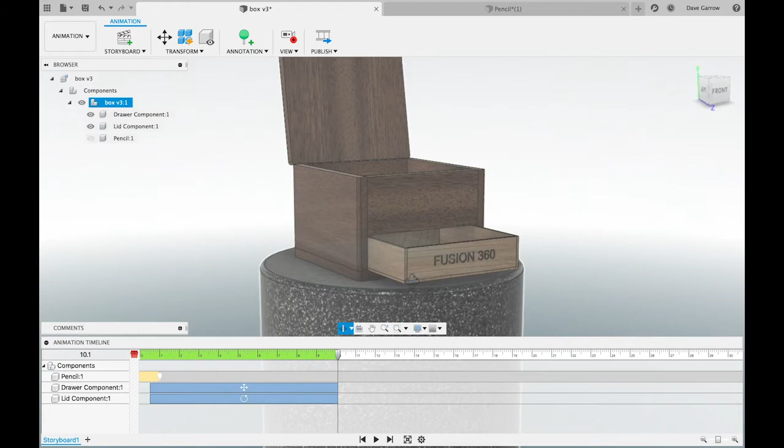So let's say in the 10 seconds, whilst it does its opening thing, what I want is to pan like this. And it's recorded that movement. So you go back, you're in your original position, and you click play, and then as that happens, the camera moves at the same time. Easy.

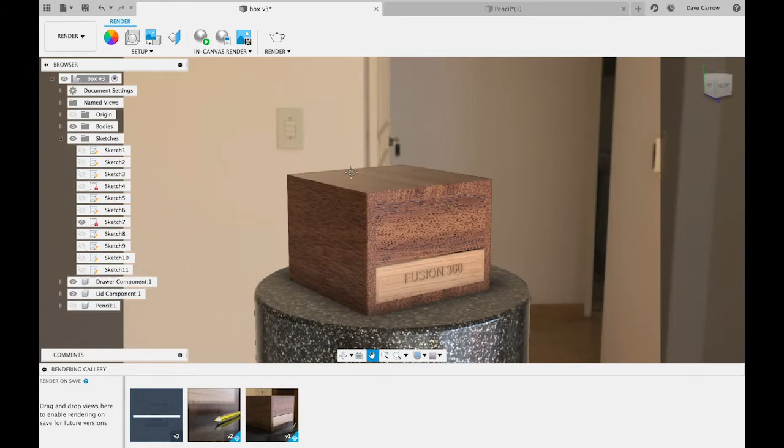So let's go back into render, and you can see it's starting to just do that render now, which is fine. That pencil just looks in the way. So if I want to render this with some of these features out, you just click the feature you want, click M for move, and just move it out, click OK, and then I can render it with the drawer out, whatever you want.

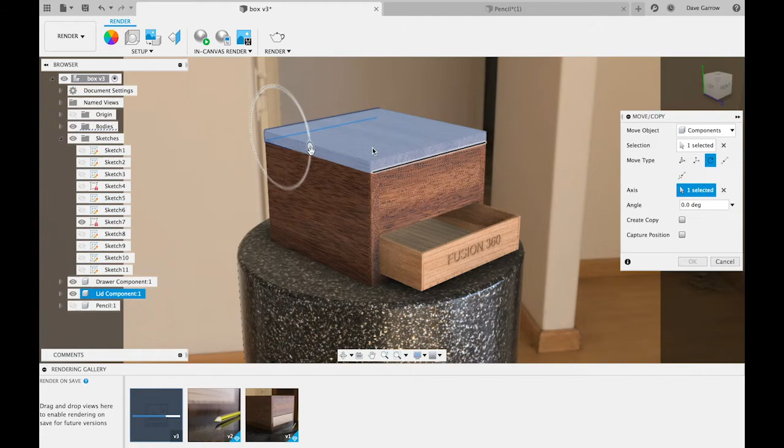So remember, if you're trying to move this lid in the render section or the model section and not the animation section, you have to click rotate, click the pivot point, and then rotate as far back as you want. And then you've got this nice and open.

And every time you make a new render, if you've done a depth of field, center of focus, it stays in the same place until you click it off, click it back on, and then move it to somewhere else.

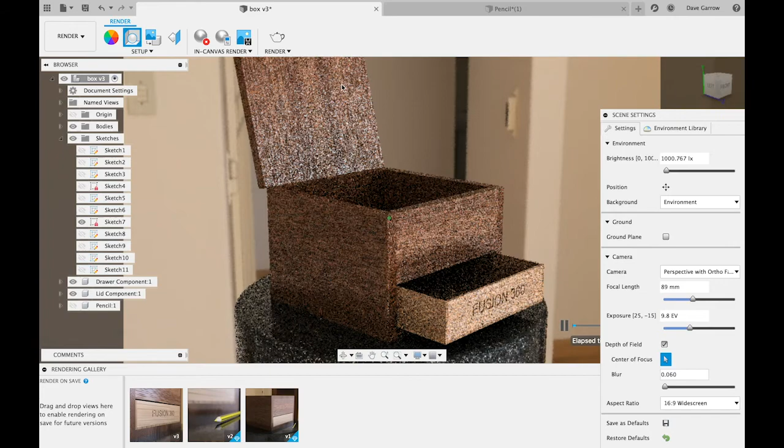So this, if I was to create this, set it to 60, that would look quite nice. So stop that and just check out this last render. That looks okay.

You can see the difference here in grain of wood. That's important, that you don't click join when you're making new sections. If you don't do new body, this would all be the same grain, but these in theory would be separate sections of wood. So here, how this grain is different from here, that's important. You don't want this grain to be flying all over this stuff because it's not realistic. You want that to be as close to real manufacture as possible.

But there, it just shows you the engrave. It's quite nice. Okay, so back in here, I don't think there's anything else to show you.